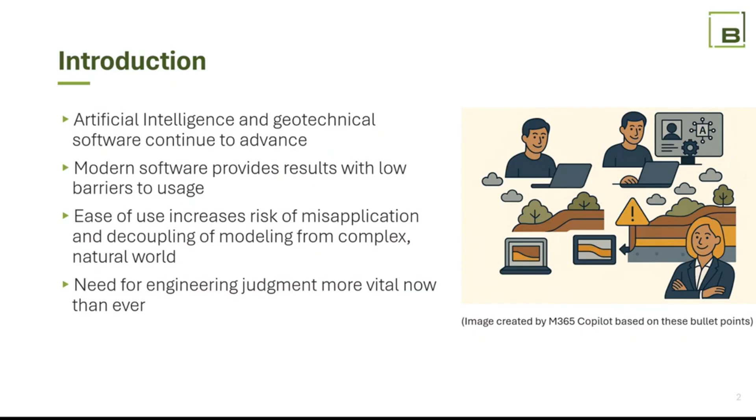All right, so this is my introduction. AI—everyone loves it. And geotechnical software has really advanced, particularly in the past 5 or 10 years. There's relatively low barrier to getting into it. It's very easy to get into a software platform, open it up, run the program, and have an answer. As a result, the ease of this application is really huge, and we need more engineering judgment now than we ever did before.

So we're familiar with artificial intelligence. There are distinct groups that are really pushing that artificial intelligence should be used everywhere and for everything. But artificial intelligence—I'm not going to read the whole slide—it's just, how many of you, what is your local practice for determining undrained shear strength using an SPT blow count?

Just for that, the rule of—was it the Terzaghi 125 pounds per square foot per blow? There's other methods that correct for plasticity. They're just empirical. They're based on a set of data, and as a result we come in with a formula that we use over and over and over again. It's based on a set of data in which that empirical model was developed, and that is what AI is.

AI simply is using big chunks of data to develop algorithms that can create answers based on that data. So the quality, breadth, and bias of the data set directs the creation and therefore the results produced by the model. So if you're dealing with a data set that's internet-wide, wow, it seems like that model knows a lot of things. But they don't possess judgment.

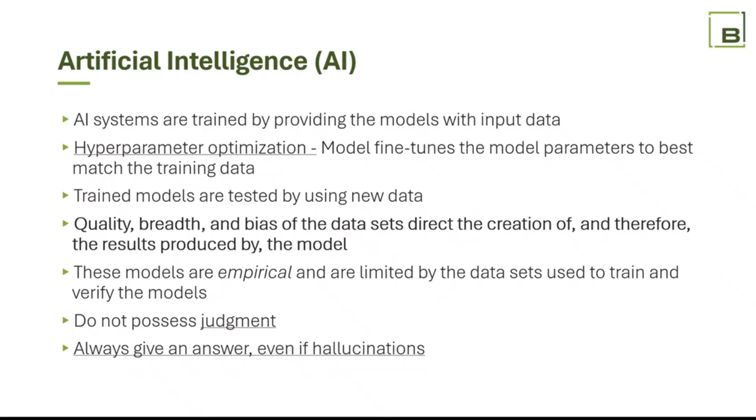So this was a recent study—I'm sorry for the size of the font—done by Deutsche Welle, BBC, and NPR about the accuracy of these large language models when they ask them questions about current events. And it is tremendously bad. So the y-axis is percent error, it's just a bar graph.

They tested Copilot, ChatGPT, Perplexity, and Gemini—four large language models. Gemini had 78% serious errors when asking questions about current events, such as who is the Prime Minister of Germany? Got it wrong. And that's Gemini, that's Google, that's trained on all the stuff that Google does. 45% across all those platforms had serious errors.

And we see a bunch of the rising generation coming in, going to them for their news sources. So almost half of the results are just bad. And then the rest, it's like 81% that have some significant errors. That's AI.

The singularity is nowhere close. But we need to be careful. AI tools are great, but we've got to apply judgment to them. Too many people do not understand that. They think that because it's an AI, it works.

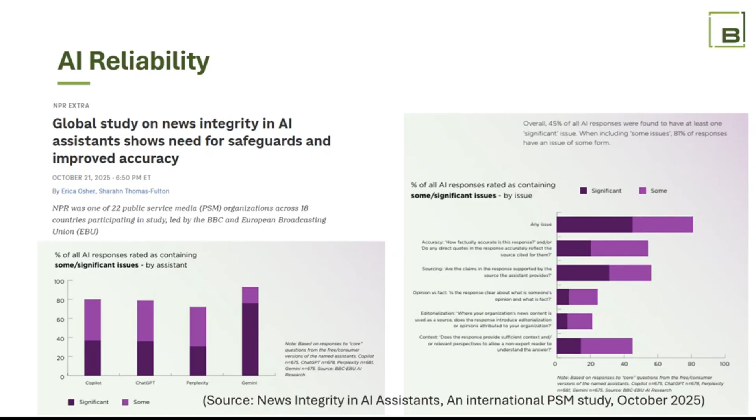So in geotechnical engineering, we do a lot of analysis. That's the heart of what we do. We look at the earth and we make judgments based upon the data as we analyze it.

And it's everything from sitting down doing this—that's an AI generated picture, just tried to throw something together. Show me an engineer doing hand calculations with paper and pencil. That's what the AI thinks.

But analysis allows us to evaluate the responses of the system when we subject it to some type of stress or change from current conditions. There's all sorts of different tools. I'm going to talk mostly today about slope stability analysis, which is generally limit equilibrium or numerical analysis.

Finite element—the picture on the right is kind of illustrative of how sometimes I feel. I have these very, very high-end computer programs, and I'm dealing with a coal oil lamp.

This is not AI generated. This was—in summer of 2020 we had what's called the derecho that came through eastern Iowa, 140 mile an hour sustained winds for an hour, an inland hurricane, wiped out cell towers and everything.

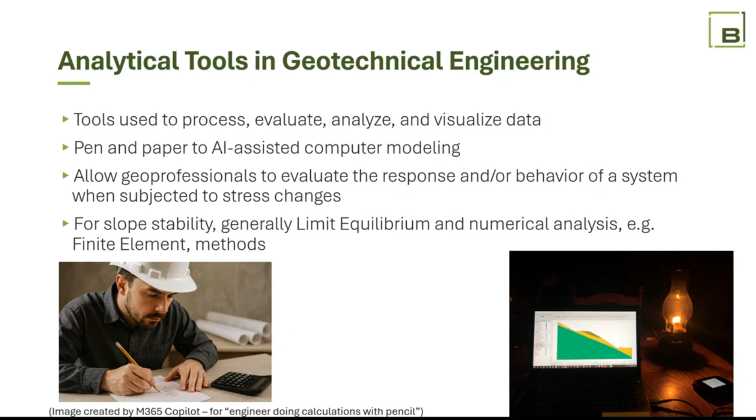Took 4 days to get data, but my boss still wanted me to work. I had data before I had power. So that's just me working by coal lamp.

So analytical tools—we are using models to analyze the site. So limit equilibrium is simply looking at the driving forces and the resisting forces, and the ratio of the resisting forces to the driving forces is your factor of safety. It is not a material property. It's not a fundamental material property. It is simply a ratio.

The limit equilibrium models make some pretty gross assumptions, but they work well, and we see them applied well in practice. They're proven—true is not the right word—they're proven out to work well within what we know.

The big part of the problem with limit equilibrium is that it doesn't account for deformation. It's a simplification of how the process works. Finite element is more complex and does consider deformation, but they're all based upon a constitutive model that's based on a set of data, which also makes them empirical.

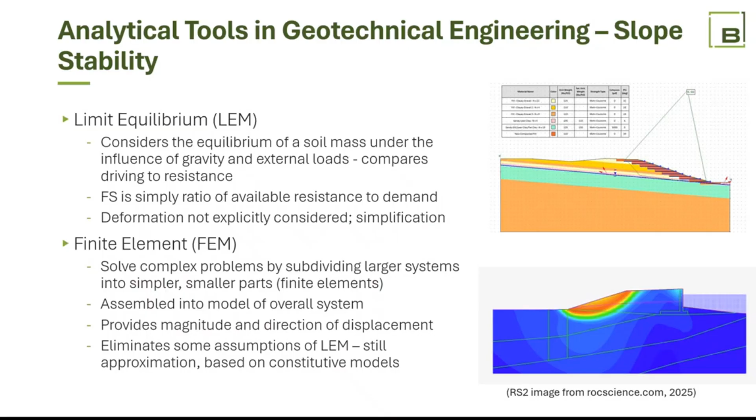So we have to make sure that we're using the right constitutive models and training up the next generation so that they look at that before they apply the software.

Because models—and we use models all the time, not just with us, but we hear about climate models and economic models—all these different models are basically simplifications of very complex systems. And we use the models to evaluate the response of the system to changes in inputs.

But they really need to be calibrated against what we, as the profession, understand is going on. The incorrect models lead to wrong conclusions.

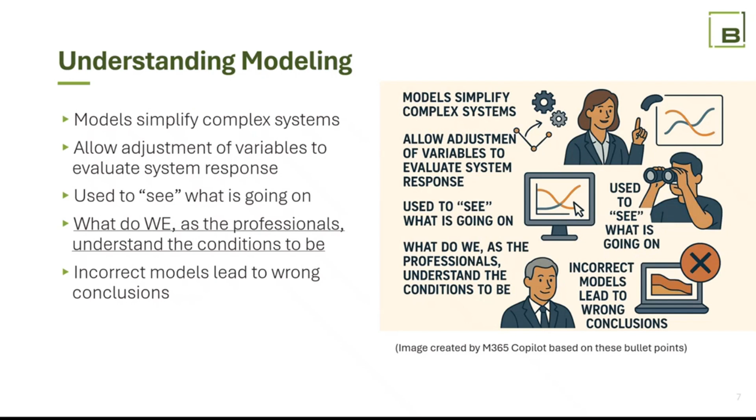This is another illustration of how AI can be used—Copilot, put those slides in and give you a picture on it. I'm going to spend a little time on this because this is kind of the basis for the case review I'm going to be talking about.

Accuracy, precision, reliability, and validity. How many of you are shooters? This is reminiscent of sighting in a rifle. There are 4 targets, and there are different groupings.

The one on the left is very precise, getting close to the same point every single time we pull the trigger. However, the sights are wrong, so it's very inaccurate. So, high precision, poor accuracy.

The second one—if you took the loci of all those points, it's on the bullseye, but it's all over the place. So it's accurate because the average is in the center, but it's not precise. Getting the same answer over and over rarely happens.

The third one is just bad—all over the place, not close to anything. But where we want to be, of course, is the far right one: high precision, high accuracy. We're getting the same results over and over again, and those results are accurate.

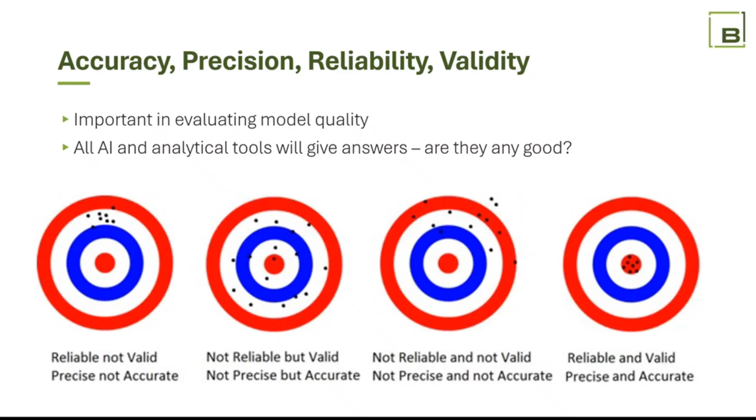The challenge with geotechnical modeling, as some mentioned with coefficient of variation in the previous talk, is that earth materials are highly variable. We know that. It's an inherently heterogeneous environment we're dealing with. We have limited data—we talked about the 6-inch holes every 150 to 300 feet. And the empirical methods we tend to use also have high variability.

So we use widely spaced data, and then we put it into an empirical model to get an answer, and then we put that into another model that has variability in it.

And so the implications for modeling accuracy are pretty obvious.

Now, this is a table down here. Again, it's hard to see from the back, but the unit weight for clay and sand, coefficient of variability is pretty small. We can get that pretty well. That's not going to vary all over the place.

We can put a Shelby tube in there, we can do a moisture density, and we can feel pretty good about it. But when we get into friction angles, for sand it's pretty well known, but for clay, the coefficient of variation is huge. Same with just running a PI on a single sample of soil, we can have wide variability on those test results.

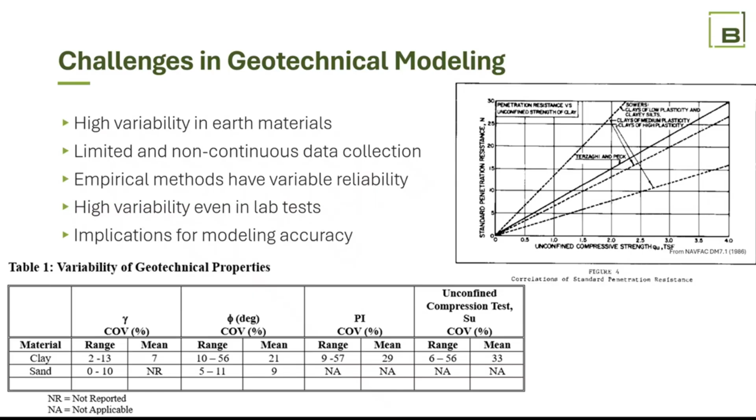It's been something that has been worrisome because it seems like coming out of school they didn't get taught this. They just said, this is the test, here's the results. They didn't get taught well that you've got to look at the percent saturation in there, that the true result is only valid if they're 100% saturated. We don't generally deal with that very much.

So Ralph Peck, wise sage of our profession: in the engineering for such works as large foundations, tunnels, cuts, earth dams, a vast amount of effort and labor goes into securing only roughly approximate values for the physical constants that appear in equations. Many variables remain unknown. Therefore, the results of the computations are not more than working hypotheses, subject to confirmation or modification during construction.

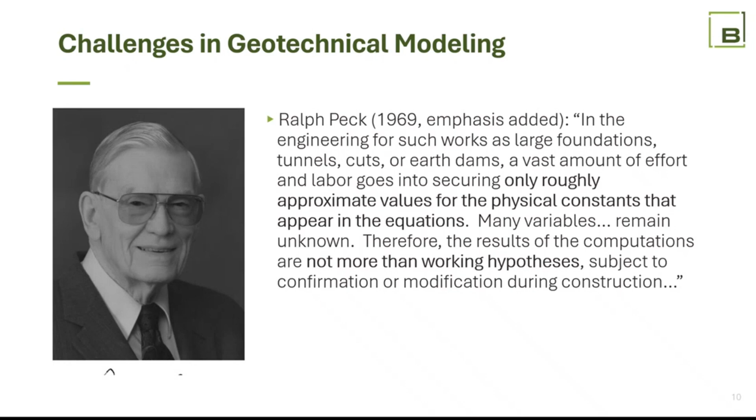The observational method. This is from his seminal work in 1969. So, the need for engineering judgment - human expertise is critical for interpretation - test the results of the AI outputs and analytical tools against the observed natural world, and distinguish between correct and realistic results. So how can we do that?

And this is a methodology which a lot of times has a name or terminology, but it's usually based on universal principles that everybody who does it knows - somebody just likes to put a name on it. And so I call this the conceptual site model.

This is the working model from which sites are evaluated. The known site information is gathered, synthesized, and continually updated as more data is obtained. It's integration of diverse data sets. All of our geotechnical projects exist within a context of an overall project, overall site, with demographics, political factors, hydrologic factors, and every sort of other variable that affects the final decision we make as geotechnical engineers. So the conceptual site model, in my mind, needs to consider those constraints and boundaries.

It only creates a snapshot of the site at a specific time, but it gives us something to work with. The conceptual site model - we should be thinking about how the site got to be how it is, from previous site uses, the geomorphology - those things go into it. And so with that, we can use the site model to test and potentially predict what might occur.

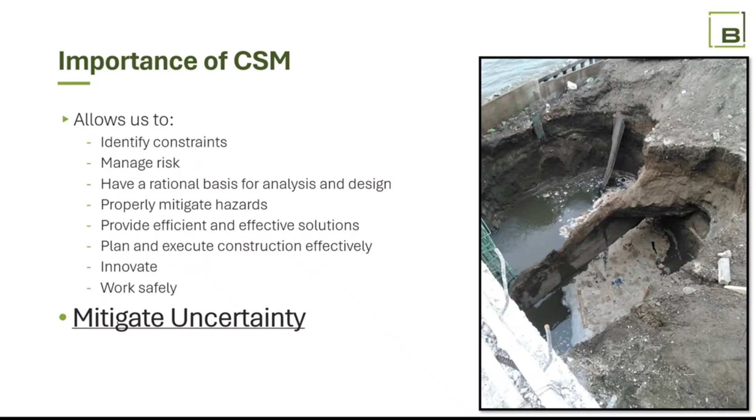So it allows us to manage risk at the end of it, to mitigate uncertainty. We, of course, as mentioned before, deal with the natural environment, with the earth, with geology, which is inherently variable. Our job as geotechnical engineers is to understand that, mitigate that, and communicate that to the project, to our partners in the project, to make sure we can build something at the end of the day. But to mitigate the uncertainty - that's our job.

So to develop the CSM, basically integrate the desktop and field data to create a conceptual site model. And ask yourselves: what is the science? What do I know from measured data? And then, we are geotechnical engineers - what is the art? What's our creativity say? What do we interpret it to be? What does our intuition and experience tell us?

If they go and ask ChatGPT, they're being put in a situation to use bad or incomplete information without judgment. The conceptual site model helps us teach them to think critically, to put together the data, to ask the questions of why.

What is the significance of this data I'm collecting? How is the data interdependent? Do I understand how the site got to be that way? Do I understand the constraints within my project that are constraining the site? And most importantly, can I explain this to another person? I could explain it to another geohead one way versus a layperson another way, but can I explain it, and identify the areas of continued risk and data gaps?

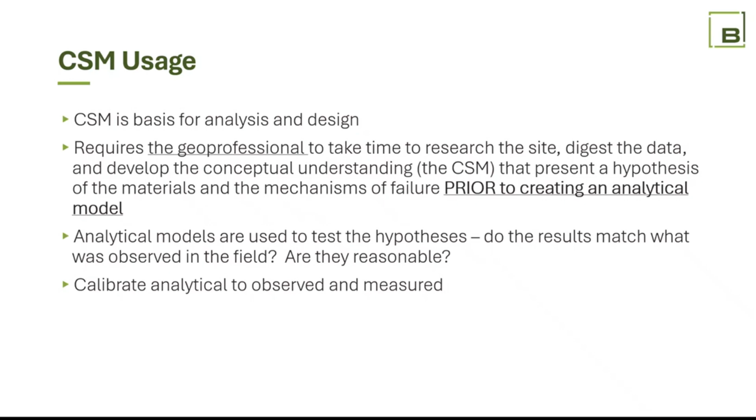If the analytical model is telling me the site is failing, and I'm looking at it and it's not failing, then my model is not right. Something I put together does not represent the work. So my job is to calibrate that analytical model to what's observed and measured.

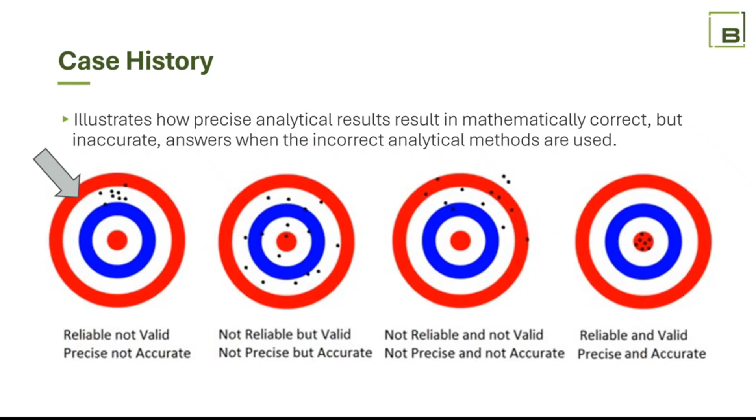So back to this, I'm going to talk you through a couple of case histories. The first one illustrates how precise analytical results create a mathematically correct model, but provide inaccurate answers when the incorrect analytical methods are used. So we're working the far left one today.

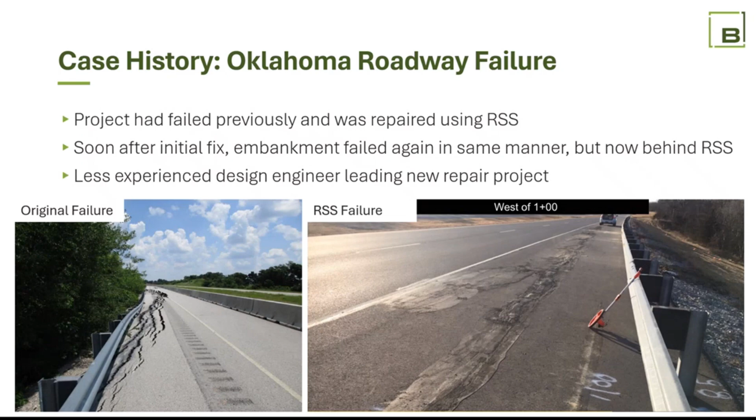The lead engineer we assigned to it was a less experienced engineer - it was kind of his first project that he was working on as the leader. So we taught him right: he pulled together a really good, solid conceptual site model.

He took aerial photos and geologic maps and the borings and the plans and what they built out there, and the inspection results from the construction of the RSS, the site recon photos and videos that we did, and from that he created his analytical model.

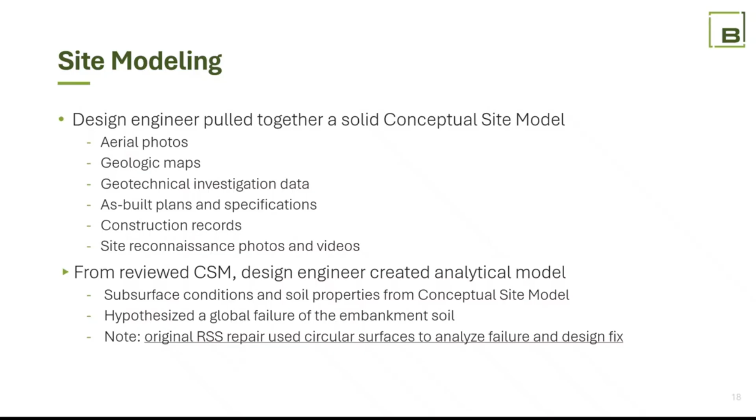He based his subsurface conditions and soil properties on what he identified in the conceptual site model, and hypothesized the global failure of the embankment soil. Just to note, the original RSS design used circular surfaces to analyze the failure and do the design.

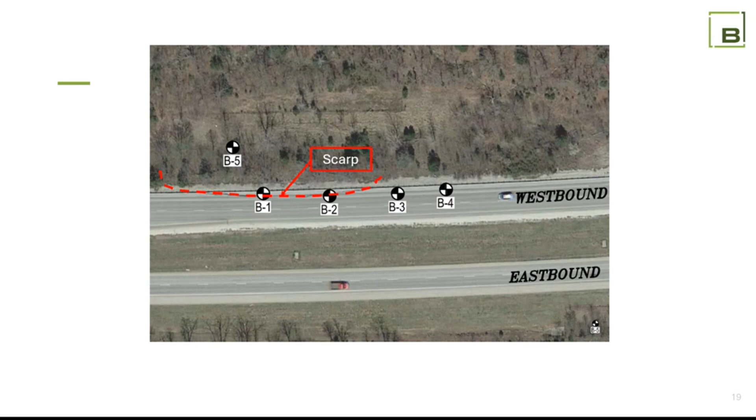From that, this engineer identified this residual clay layer at the top of the shale. Top of the embankment, toe of the embankment. So he said, looks like there's a sloping residual clay failure.

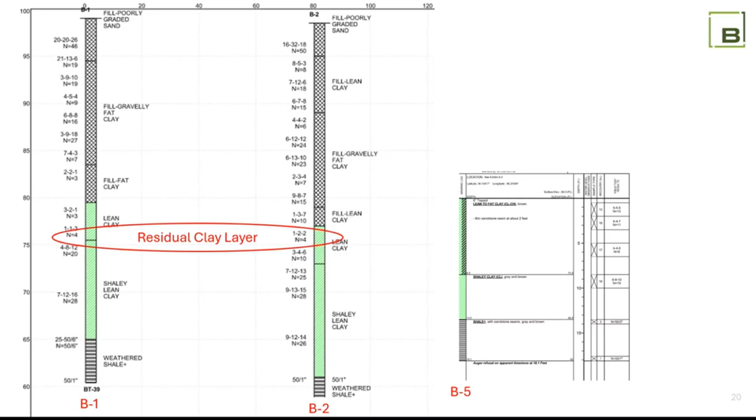Makes sense. So we looked at what the residual friction angles were based on the information for the plasticity of the soil. We used a lower bound friction angle for that residual clay, since that's probably contributing to it.

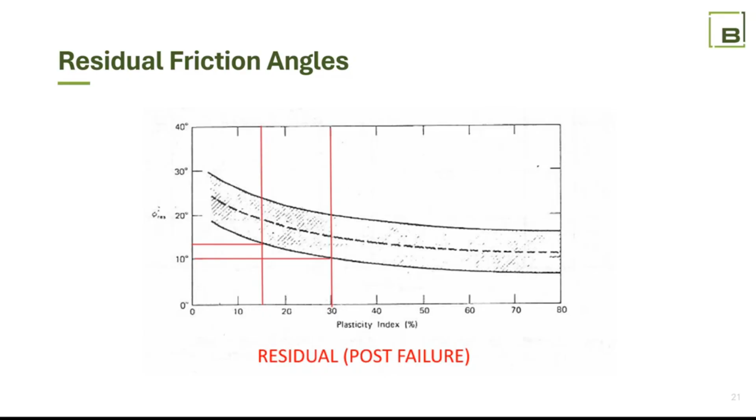So he ran his analysis, and got a factor of safety of 1.5. He's like, wait a second - he's got this sandy clay, residual clay layer, used a phi angle of 10 degrees and 0 C, that's the pink layer right there. He had his water table above that, and his model looked decent based on what was out there, but that's a factor of safety of 1.5.

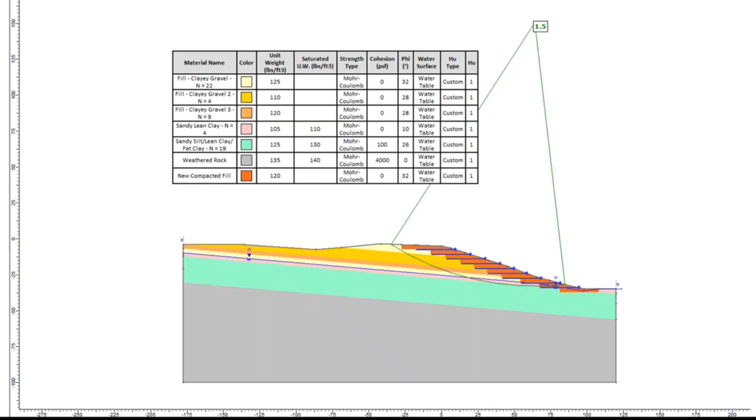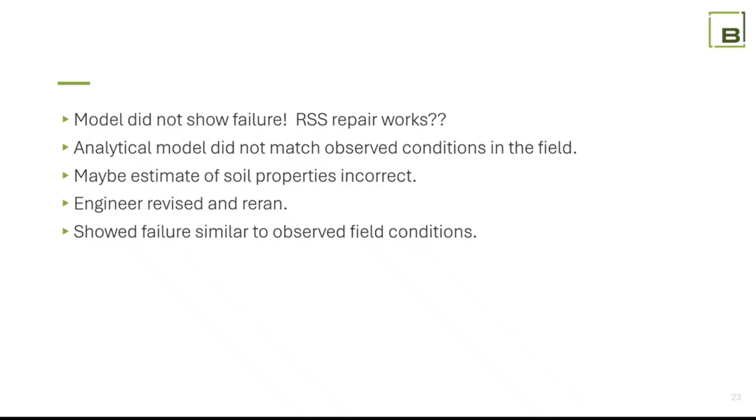Did that match what was observed in the field? No. So he said, well, maybe my estimates of soil properties were incorrect. So he revised and reran, and got a failure similar to observed field conditions.

He still had this 10-degree layer there, but he really penalized this embankment fill - he had to get it down to 16 degrees with 0 C for compacted, inspected embankment material to make it fail behind the reinforced soil.

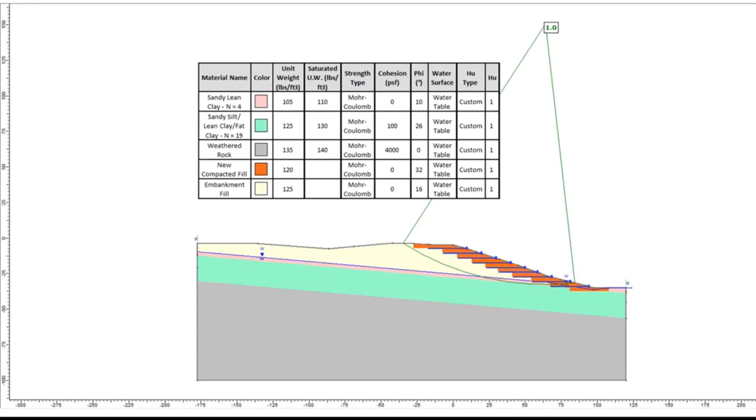So then he started going on with his repair analysis, and then he brought me in. He said, this doesn't feel right, I can't get it to work. So we looked at it, and he said, okay.

I mentioned he had to reduce his original friction angles - they weren't very aggressive. Down to 16 wasn't reasonable. So we sat down together and said, what was missed?

His conceptual site model, I have no issues with what he put together. His original soil properties were fine. But I said, well, why are you using circular failure surfaces?

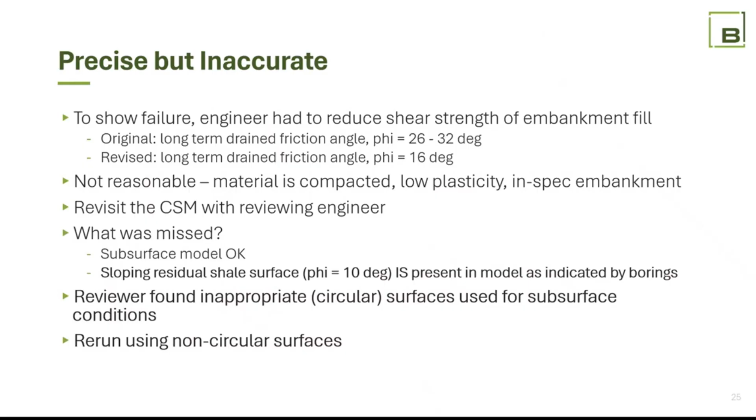Use non-circular. Just use a slide, which is what we're using, use the cuckoo search, let the program look for the worst. Boom, factor of safety of 1, using those best estimate soil properties. Nothing had changed between the 1.5 and 1.0 except for the method that he used.

Now, did the analytical program tell him, hey, you probably should be using the non-circular surfaces? No, it gave him an answer. In fact, it gave him the same answer that the original designer for the RSS got, that that reinforced soil slope worked.

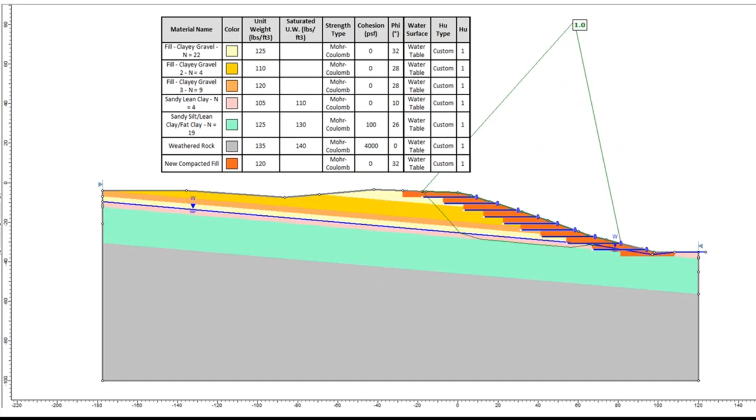Remember I mentioned before that they used circular surfaces on their original analysis. They identified that sloping shale layer as well. So it was not a matter of the software giving incorrect results. It was very precise, over and over again, the same answer, but it was inaccurate because the wrong surfaces were chosen by the designer who used the software.

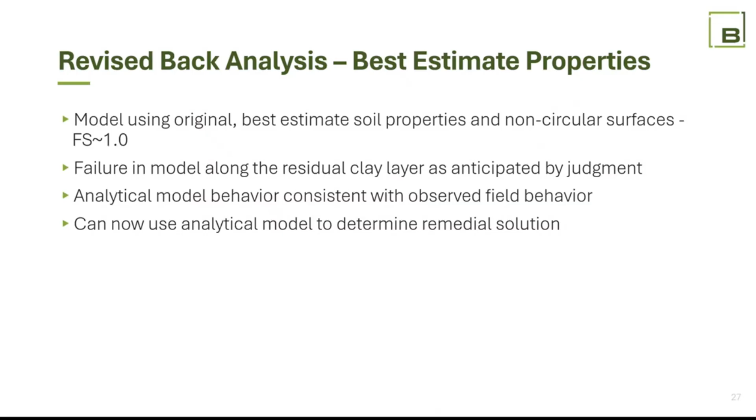So from that, we developed an analytical model that was calibrated to the field conditions, and now we could use that to make the remedial solution.

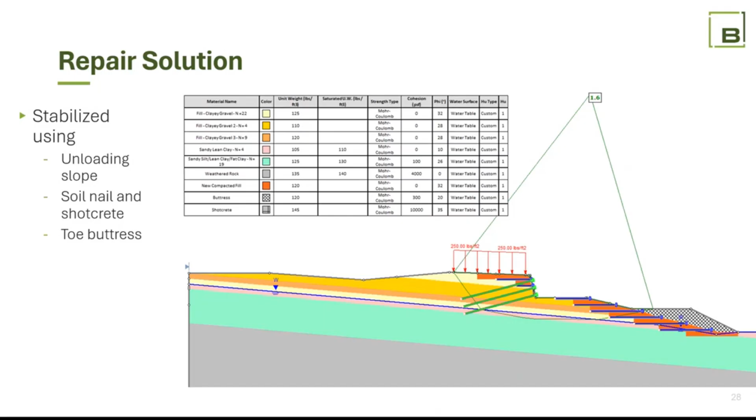And what I ended up doing was unloading the slope, taking most of the material off, flopping it down to the bottom of the slope as a buttress, and then using anchors to hold it in place. That got us back to a factor of safety of 1.6. And that's been 7 years since we did that, and it's performing very well.

So, number one, always do a senior review. Never release anything without that. And it illustrates how these analytical tools will always give an answer. Doesn't mean it's right.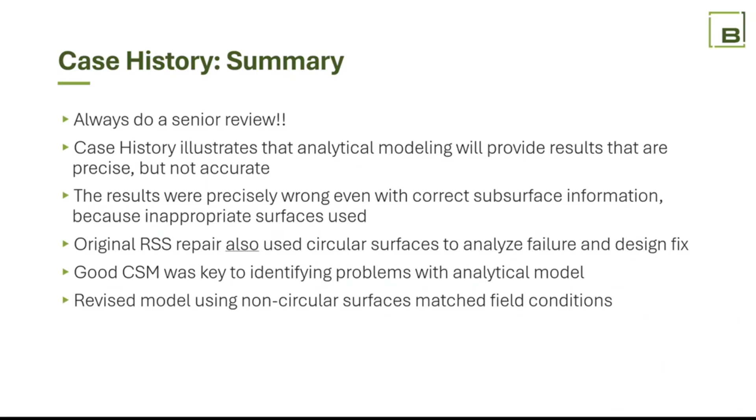So we had a good conceptual site model to make sure we were able to figure out what's going on in the analytical model, but we have to use the appropriate surfaces. If an engineer hasn't been taught that or didn't realize it, that's our job as senior people to catch that. But if we didn't catch it, obviously the previous engineering firm didn't catch it either, and there's improvement needed in our industry. Because the models gave an answer, doesn't mean it's right.

So the second case history I want to share with you today is how precise analytical results can still result in failure when the site conditions are not understood correctly.

So this is an Iowa project. Iowa was glaciated multiple times, and the last glaciation that came down is what's called the Des Moines Lobe, and the ice came off of that 12,000 years ago. So it's very, very young geology, and that's key for understanding why this failure occurred.

So the setting was there's a hospital right here, and they wanted more parking, and so they needed to level things out. As part of it, they cut, and then on the other part, they kicked out and built the extra width on with a reinforced soil slope.

Between 1:1 and 1.5:1 horizontal to vertical slope - good application of RSS. They needed to minimize the toe and keep it within the boundary of the property. But in this case, we'll see why we had reliable results, yet it still failed.

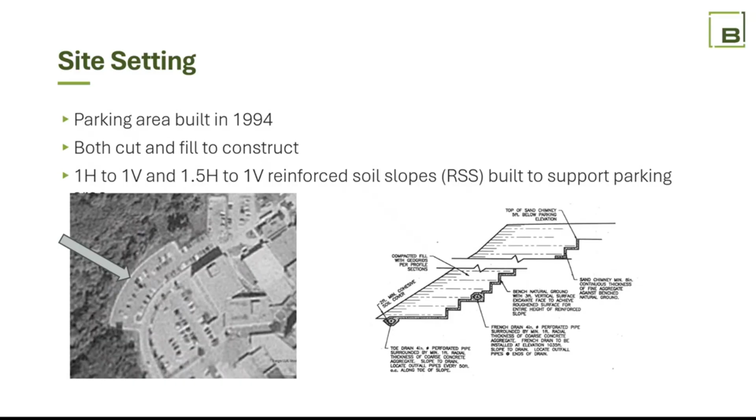So this is the site setting. Here's where the slope is, this is the hospital, and this is the Des Moines River. The Des Moines River is the largest river in the Des Moines Lobe.

We are continuing to see one of those very V-shaped, sinuous channels - steep and undercut on the outside of the bend, and failures on the other side. The failures move the creek back and forth until that creek will widen itself out and become a nicely established channel, but that doesn't happen in just 12,000 years. It takes a lot longer than that.

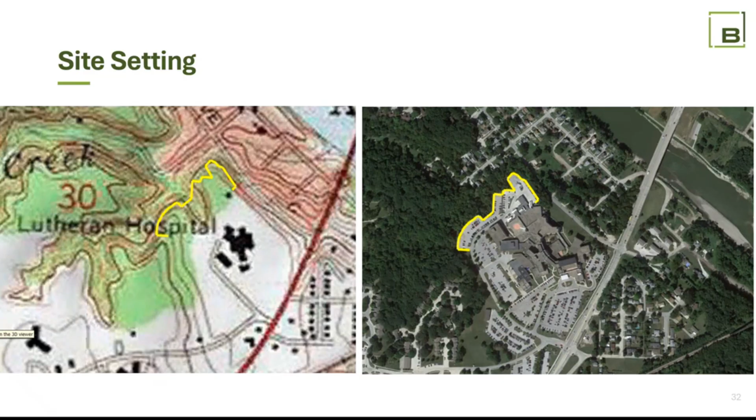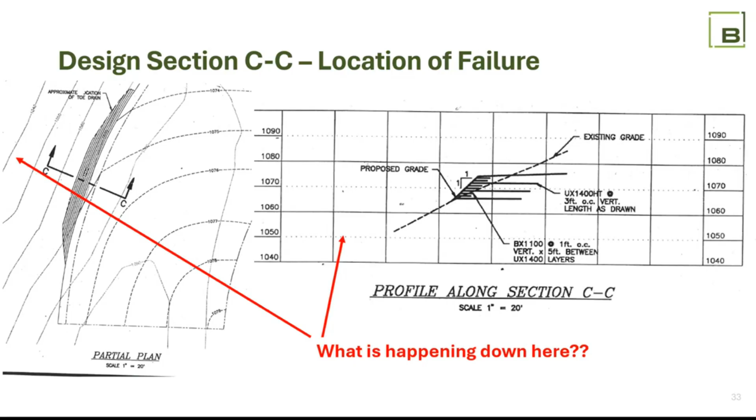So this is the section at the location of the failure. They had existing grade here that cut out, and they built the 1:1 slope right here. And here's the section. But what's happening down here? If I modeled it as they did, this section, what's happening outside of this section? Are we looking at the big picture and the full impacts of the site?

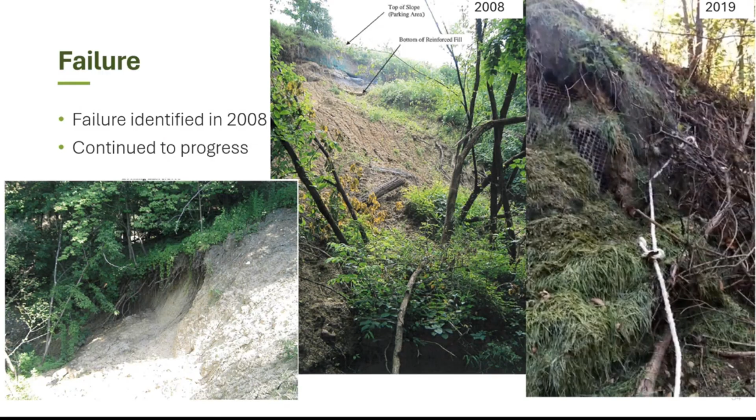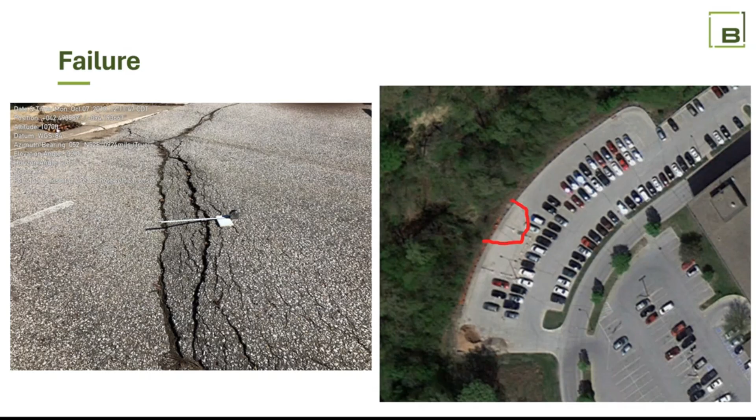Just more examples of the failure, the scarp settled down here. This is where that scarp failure was. You can kind of see it, there's a creek over here. What happened was the RSS was fine if it was in a static location with nothing else happening to it, but it wasn't. It was a very dynamic situation. There was a creek down here, and you can see the very steeply incised creek.

Creeks don't like straight lines. Water doesn't flow in straight lines, water likes to be sinuous. And it happens that they built it on the outside of a bend in the creek. Because the geology of the site was so young, it's still trying to come to equilibrium, and we superimposed infrastructure on top of a site that wasn't yet in equilibrium. We interpreted that the failure was due to a loss of toe support.

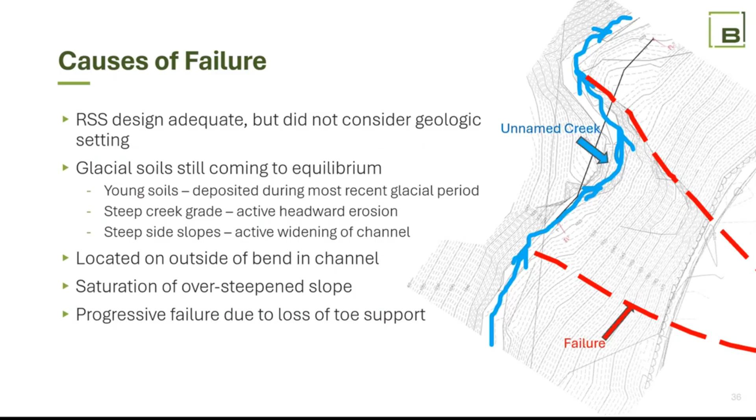So the original repair used limit equilibrium methods, very standard, a good RSS design. They had it well documented. We went through and confirmed their calculated results matched the initial designs. Then we did our post-failure analysis to calibrate the soil properties, and we identified that the problem with their design was that they did not take into consideration the geologic setting of their project.

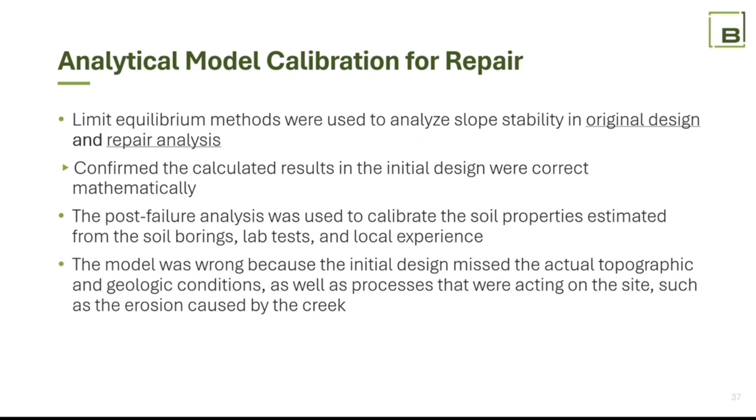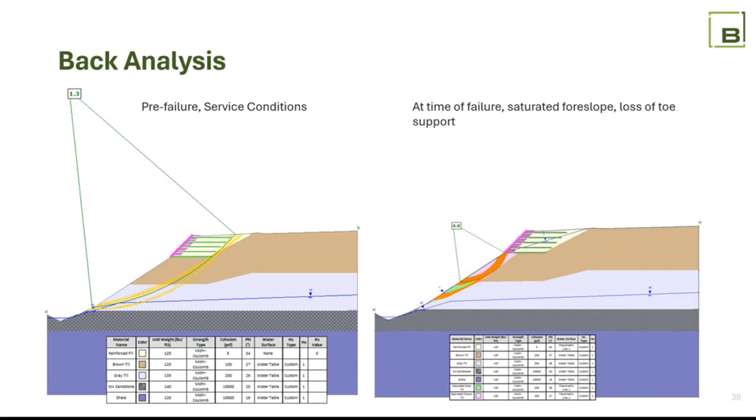So in the back analysis, here's the RSS just perched on the top. Service conditions met the factor of safety of 1.3. However, with a saturated foreslope, the factor of safety dropped below 1, and as a result they lost all this out here. This was unstable and had a factor of safety barely above 1, which when it rained, more toe was lost at the bottom. That would continue to go down, continuing to progress, until it came back to an angle of repose, probably right around 2 to 1.

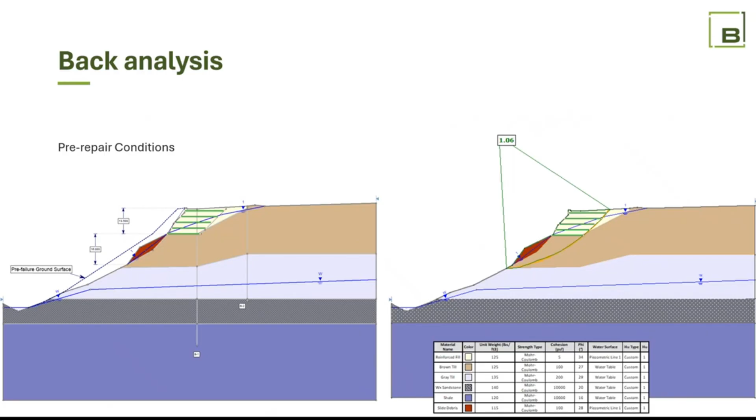So we used that calibrated analytical model to develop the repair, and our repair accounted for future creek erosion and additional loss of toe. So instead of just repairing that RSS, we took the slope and put in a reinforced shotcrete and soil nail wall much deeper, using hollow bar soil nails and shotcrete, and we checked stability at normal everyday conditions.

We checked at service conditions, and as for the service conditions, we also checked extreme. Now, we talked earlier about the limit equilibrium slope stability—we look at factors of safety, ASD design, which is a single number. I personally still use ASD analysis, but I use the service limit cases from LRFD to check it. So normal service, extreme—that's earthquake or flood, high precipitation events, rapid drawdown. We look at all of those different conditions that slope might encounter during its lifespan.

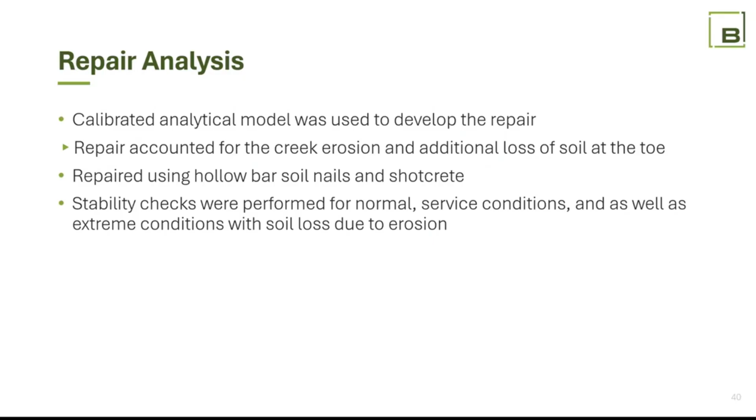So our repair, we took it back to that 1.3 because it's a parking lot, there's not a structure, we felt 1.3 was appropriate. And we looked at both the service limit, and then we saturated that toe, and we still had the factor of safety that we needed.

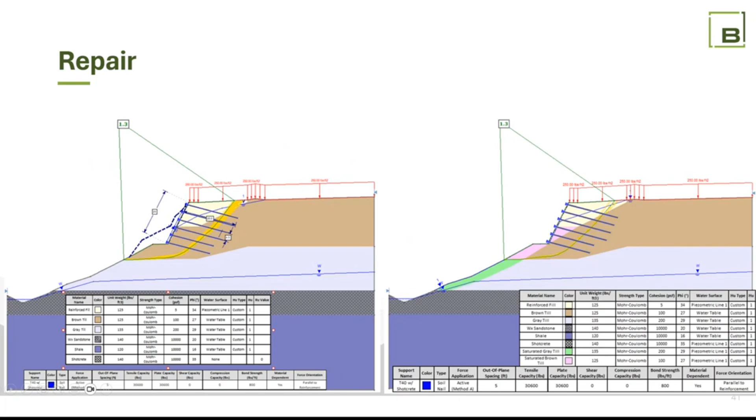So you drill in the ground, pump grout through the middle of the bar, which flushes the cuttings out, and then once you reach depth, you pump grout so that all the cuttings are out and you get clean grout back, and you leave the bar in place. So it's a single step process rather than a two-step process like traditional solid bar soil nails. And the FHWA manual now recognizes both as legitimate strands to be used in soil nail walls.

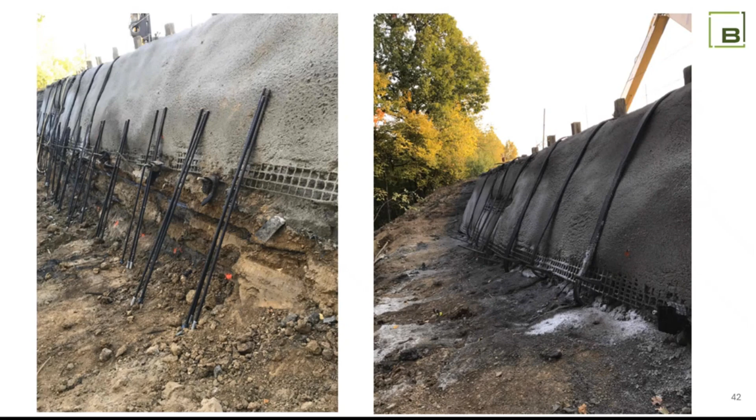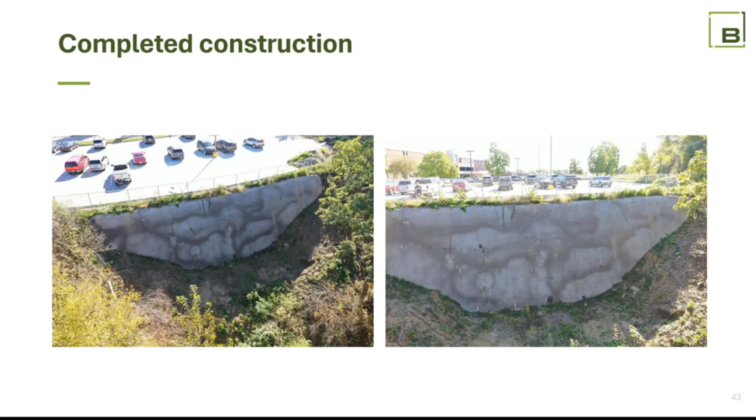So in summary for this case history, analytical modeling can produce results that are precise, that can be reproduced over and over. The original designer for the RSS used Stable6, slope stability software, and we used Slide, and we got the same answer using the same input properties. The problem was it didn't match the site. It didn't take into consideration the geology and the conditions that slope was going to be exposed to. It just looked at the stability of the reinforced soil slope.

Well, how do you control the erosion at the toe if the creek is still active? We just said that it's going to come out, so we checked it against more and more toe loss. So what we did was we doubled the height of the walls so that the foreslope was much flatter, and then we allowed for loss over time. So you didn't do any erosion control—it's just merely allowing it to take place and taking a higher demand into account in the stabilization. Exactly.

So the end-point geology matters. You're hiring a young geotechnical engineer—ask them what they thought of their geology for engineers course. If they didn't like it, they probably ought not to be a practicing geotechnical engineer.

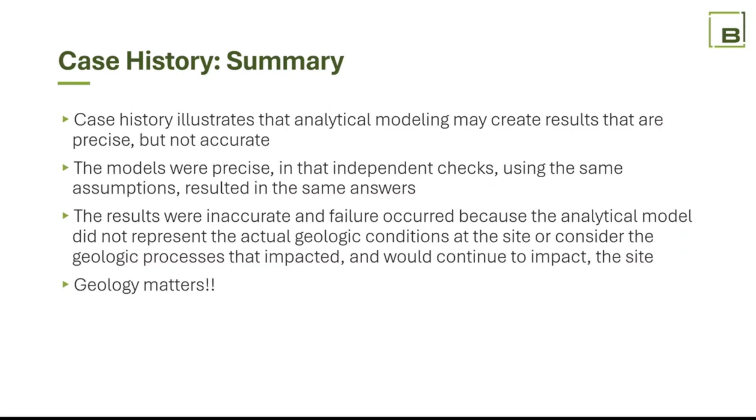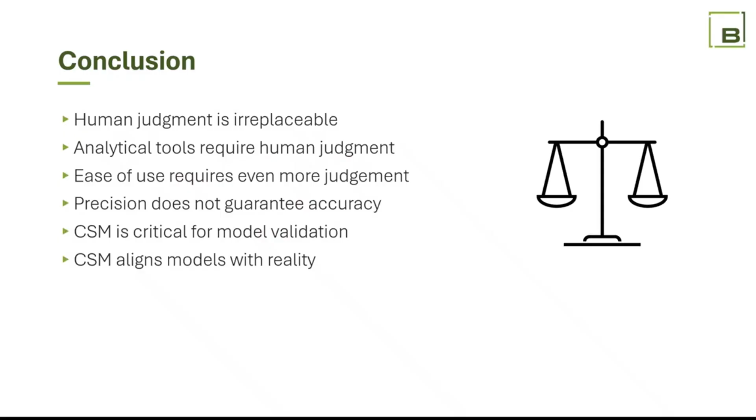So, in conclusion, human judgment is irreplaceable. The tools we use to aid our judgment are getting better and better, but we have to understand the limitations of those tools—both the ones we control everything in, the analytical models, or the analytical tools. Even with them, are you going to run a Spencer analysis that meets both moment and force equilibrium, or a Bishop's analysis because it's quick and you can do a hand calc check against it? Are you going to use something like Plaxis? What is the constitutive model you're using—strain softening, strain hardening? You still have to pick, because those models have assumptions built into them. We cannot turn the judgment over to the software, and we cannot turn it over to AI. Precision does not guarantee accuracy. A tool to help with that is the conceptual site model, because it helps us validate the models we've created and make sure those models align with reality and what we anticipate.

Thank you. Any questions, comments? It looks easy to get engineering judgment—so what do you recommend one does to form that judgment, other than being in the courtroom?

Experience, varied experience. For example, as a young engineer I had a site with a potential liquefaction problem—old creek beds that had been buried during the construction of I-405 outside of Renton, Washington. We were putting a new ramp across it, running analysis, and I had my model set up, and my gut said this should be failing, but it wasn't. I changed all sorts of stuff and it just wasn't failing. It didn't feel right. So I turned it over to my senior reviewer, and he looked at it and knew immediately. He said, 'Roch, you're using circular failure surfaces.' Because it wasn't catching this liquefiable layer, even using huge radiuses. It wasn't catching it. Once he fixed me and I fixed the model, it failed. I knew enough at that point to have a sense it would fail based on the configuration, but I didn't have enough experience—that mistake had to be corrected by a senior engineer.